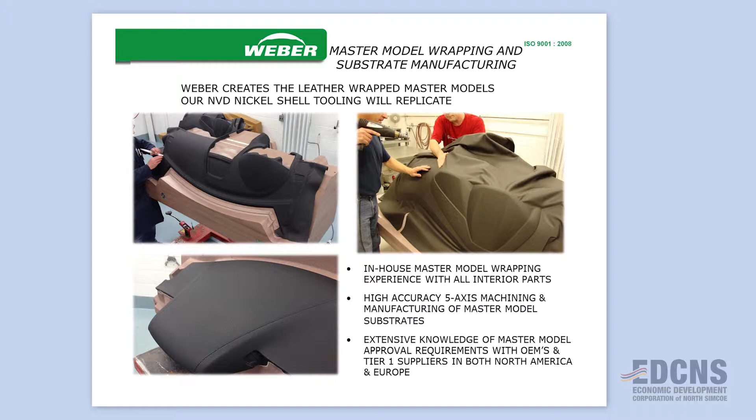So we'll talk a little bit about automotive interiors, what we do there. Next slide. We have a very unique process in texture replication. With this NVD process, simply put, if you have a shape you want to replicate on mass scale, we can take a master model, which we're actually capable of doing in-house. OEMs for years in the past would do all their mastering of their cars in their own facilities and then pass on the mastering to the tool makers to build it into production. We've taken that technology and brought it in-house at Weber. We have skilled people we've trained from Europe—we sent our employees over to Europe to learn the skill from BMW, Mercedes, and Porsche, and bring that technology back to Midland. Now we are the master model makers for many automotive interior programs. This is a special skill that we keep these employees current on, and it gives Weber a leg up and a unique opportunity for OEMs to use our services, because we're providing the full service to them.

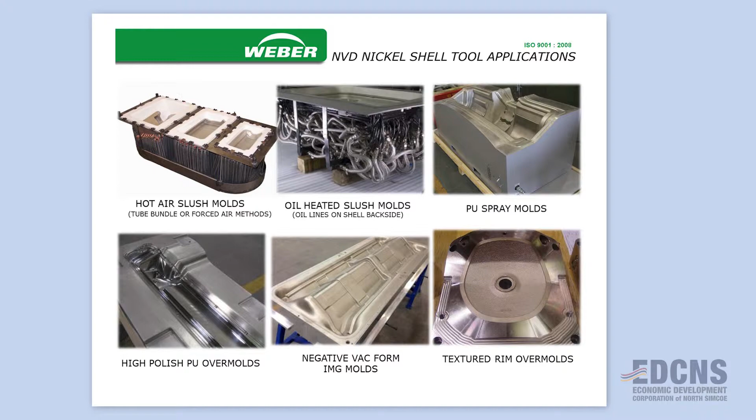Next slide. Once you do the master modeling, we're also very flexible on the type of tooling we provide to the industry. Some tool makers are very well set up for injection on the fascia tools, or they have die casts for engine parts. We actually have the flexibility to build tools in many different styles and ways to meet the needs of automotive. We'll do the normal slush process that's required, a PU polyurethane spray process, and we're into IMG tooling. We have the ability to build different types of tools for different industries, even though there is some common ground between the tools in the sense of the nickel.

Next slide. This is the exciting part that's really growing for us, the exterior part of our business. Using the same technology, a nickel tool with no texture, we are now entering the market of luxury vehicles in carbon fiber.

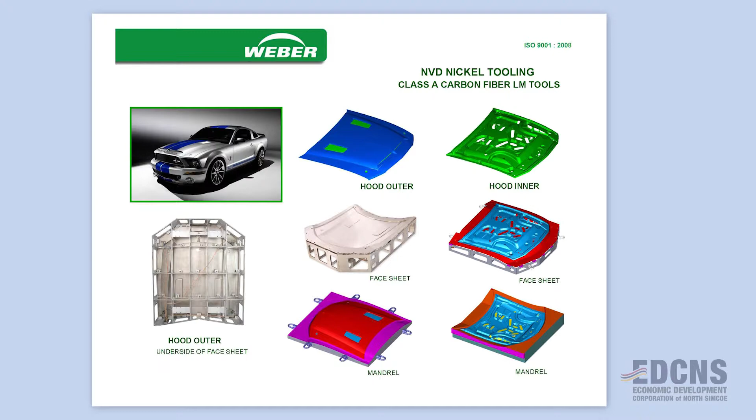So again, we're taking a nickel tool and making carbon fiber parts for most of the luxury vehicles out there. This nickel shape is used to make a carbon fiber part that's cured in an autoclave or outside of an autoclave. If you don't know what an autoclave is, just think of it as a big oven. We've actually developed a process where we make tooling outside of an autoclave, and if you're in aerospace or automotive and don't have to buy and heat large ovens, it saves millions of dollars a year in energy consumption for each of these OEMs.

So we've developed this process. Now somebody like Boeing, who we're a preferred supplier to, doesn't have to invest in an autoclave anymore. They can buy full assembly parts or tooling from us to make parts that just sit in a building with no large energy hogger like an autoclave.

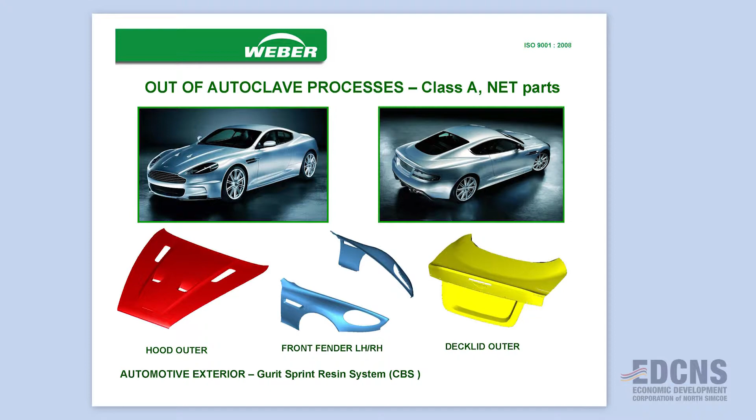In the case of Aston Martin, we do a lot of tooling for them. This is actually a very unique one. You've probably seen the movie Casino Royale, the James Bond movie. This is that car. We not only built the tools, we actually built the prototypes for that movie.

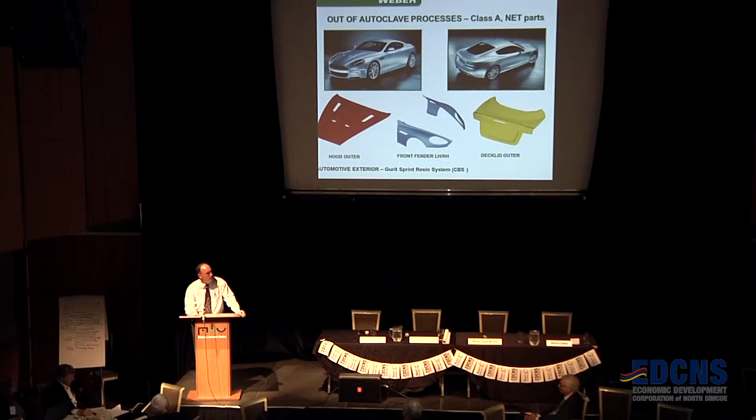Aston Martin was in a rush to get cars into that movie, and they didn't have time to bring the tools into production. So those tools were put into production here in Midland, and the parts were shipped off so they could be built into cars for that movie. That was exciting for us, and that car is still in production today using the same technology.

Another area that's really growing for us and taking off for a number of reasons - first, we're specializing more in aerospace, but we also have a controlled goods certified program, so that gives us the opportunity to quote on defense and military programs, which is really broadening our abilities and getting us out there on a global scale.

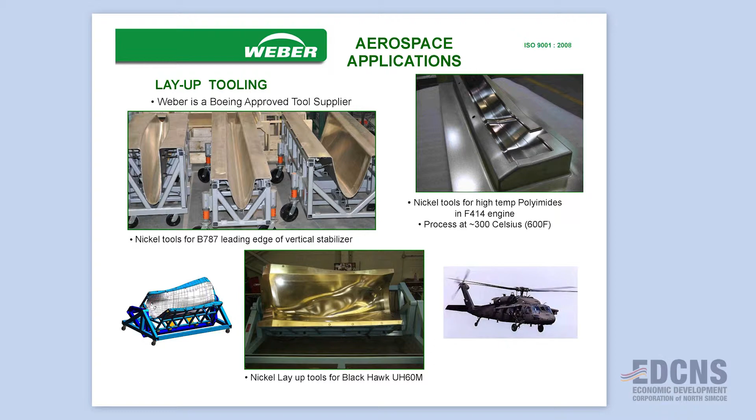It's using the same technology. So we took our automotive technology, where we'll build a nickel tool and put it into a steel frame, and attach heating and cooling lines to the back, to get into aerospace. The difference with aerospace versus automotive is the requirements - clearly aerospace requirements are much higher than automotive when you're building a tool and then eventually a part. But that's helped Weber build ourselves up to a much higher level and provide world-class tooling to all industries, not just aerospace.

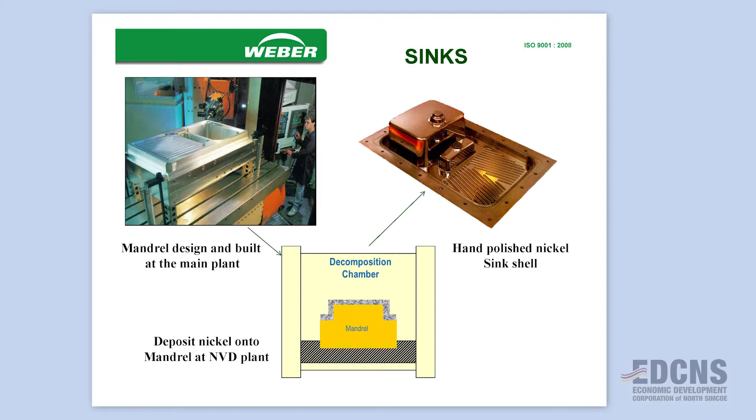The next section here is sinks. This is an interesting business in the sense of the market size Weber controls - Weber actually has over 90% of the sink business in the world today. Now, these are not sinks we build for your home, these are tools to make sinks. So if you have the acrylic-filled granite material or a DuPont-style material, these are your under-the-counter mounted sinks or composite sinks. We service 90% of those people around the world for those sinks because nickel is so unique for the properties of processing that. So Weber has a leg up and an advantage, and here again, we're doing it all in Midland.

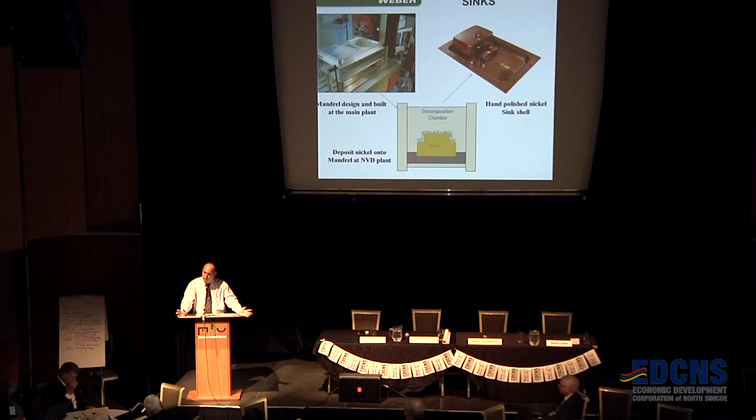Next slide - this is near and dear to me.

MasterGrain was a concept we came up with in 2008. We launched our first fiberglass doors in late 2008. Since then, we actually started in Mexico. I hate to say that, but we started in Mexico because we were just a new startup company. We needed some help in molding and door assembly.

Within a few years, we realized the quality of service we were getting, the trouble at logistics, crossing the border between Mexico and the US, was becoming a real pain. We actually brought that entire business back to Midland, and now we employ 34 new employees because of that. And I see this business, MasterGrain alone, growing larger than Weber is today.

And I see that happening in the next 5, 6 years, not a problem. Our doors right now are sold all throughout North America as a premium fiberglass door. And it's just really nice to see a premium product like this. And I know you can't really see it by the pictures, but because of our nickel technology, we replicate wood right to the atom. So if you have a wood door and we take a replica of that door, we can mass produce it, and it looks and feels and stains like real wood. You can't tell the difference. So we're really competing at the wood door level with more of a medium market price point.

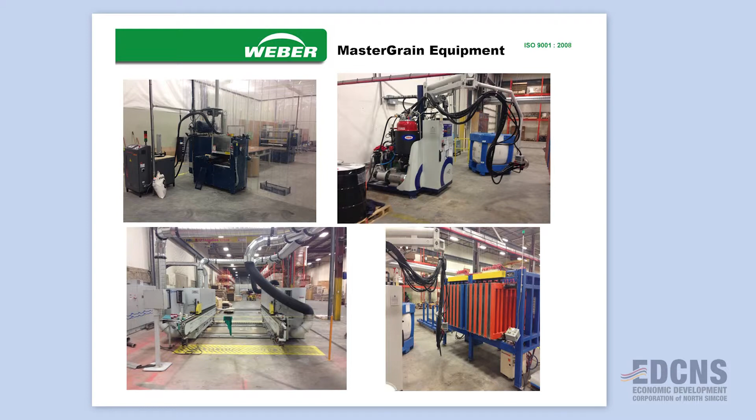Next slide. That's just some of the capital investment we made down at Plant 3. We've invested over $1 million into equipment down at Plant 3, which is the Darrell Building. We have 26,000 square feet down there. And we've invested over $6 million in tooling to make many different door designs and frame components.

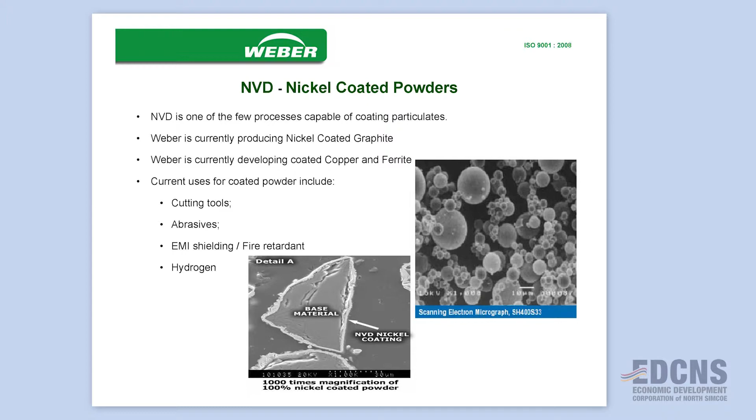The last one, which is not as sexy as the doors, I find, but you have to talk about it, is actually an interesting one also in its own way. It just shows our diversification. Here we're a tool company as our core. Now all of a sudden we're in the doors, and now we're into coated products, and in this case, graphite coated in nickel. If you look at them individually, you don't even see a connection, but when you get down to the core of it, it's our NVD process.

That nickel vapor deposition has so many opportunities for Weber to grow into different markets, and something like this that is really excess capacity of NVD being used to coat powders has just created a $2.5 to $3 million business for us literally overnight. We did this in less than a year and a half. This was always a goal that Reinhart wanted. We just couldn't figure it out at the time. Our management team put our heads together, and we figured out how to do it, and now it's just taking off. So it's not a huge market, but it's a nice niche product that actually gives us very good margins.

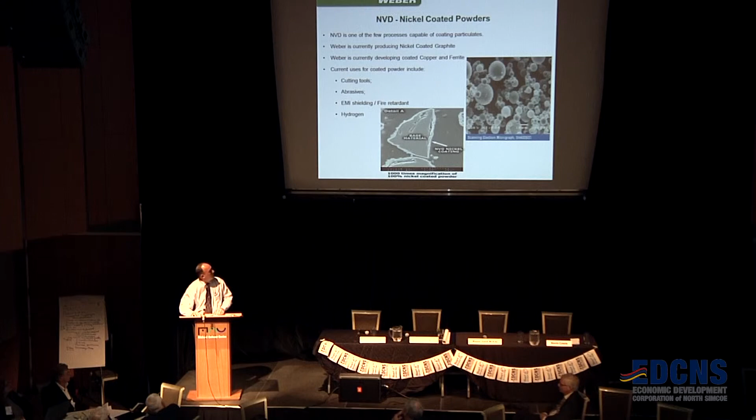But what's happening at the high school level, the guidance counselors or the teachers are not providing all the options to the students. And we're really lacking in skilled trades. I don't think there's a business in here that's in manufacturing that says, no, we're covered, skilled trades is not an issue. We all have an issue with skilled trades. And if we don't start working and developing those skilled trades better, we will lose our manufacturing abilities in Ontario, and they'll go overseas or down to Mexico or somewhere, maybe throughout India.